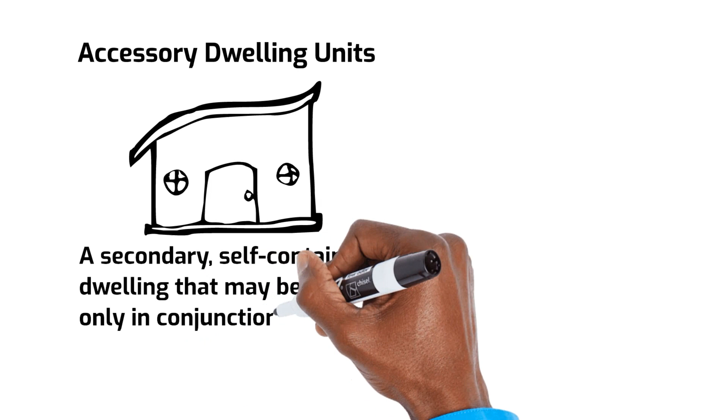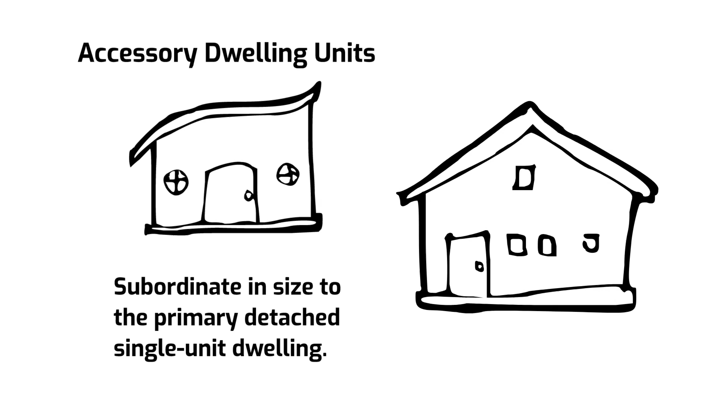Accessory dwelling units, also called ADUs, are defined as a secondary self-contained dwelling that may be allowed only in conjunction with a detached single-unit dwelling. An accessory dwelling unit is subordinate in size to the primary detached single-unit dwelling and has a separate kitchen, bathroom, and sleeping area, and may be located within, attached to, or detached from the primary single-unit dwelling.

A dwelling unit, also simply called dwelling or unit, is a single unit providing complete, independent living facilities for one or more persons, including permanent provisions for living, sleeping, eating, cooking, and sanitation.

Kitchen is any indoor habitable area designed or used for preparation or cooking of food and includes any three of the following: a sink larger than 18 inches by 18 inches, a 220-volt electrical outlet, a gas or propane service line, a dishwashing machine, a range hood, exhaust vent or similar equipment, or a stove, range, or oven.

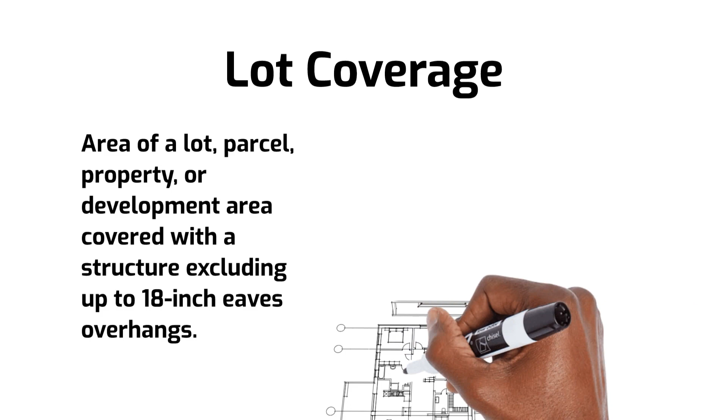Lot coverage is the area of a lot, parcel, property, or development area covered with a structure, excluding up to 18-inch eaves overhangs.

Single room occupancy, or SRO, is a residential property that contains multiple single room dwelling units where each unit is for occupancy by a single eligible individual. The unit need not, but may, contain food preparation or sanitary facilities, or both.

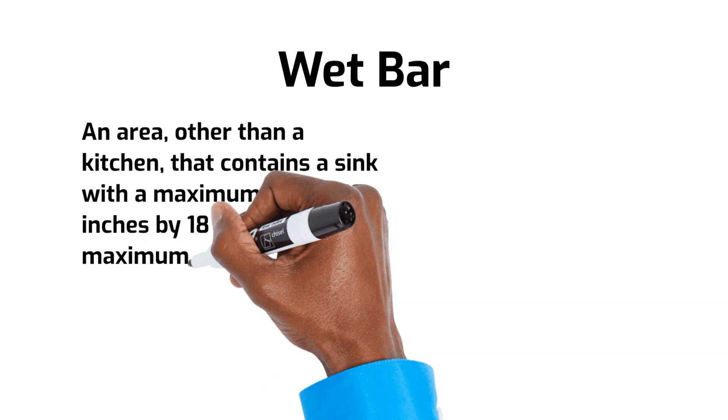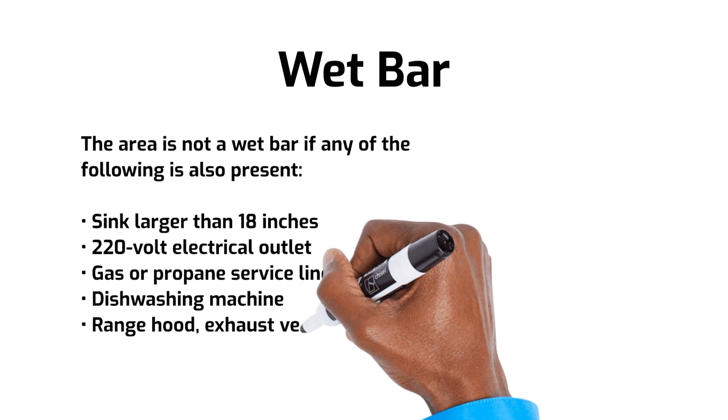Wet bar: an area, other than a kitchen, that contains a sink with a maximum size of 18 inches by 18 inches. The maximum size of the trap arm and drain for the wet bar sink must not exceed 1 1/2 inches. The area is not a wet bar if any of the following is also present: a sink larger than 18 inches, a 220-volt electrical outlet, a gas or propane service line, a dishwashing machine, a range hood, exhaust vent or similar equipment, or a stove, range, or oven.

The following terms have been added as part of the Development Code updates.

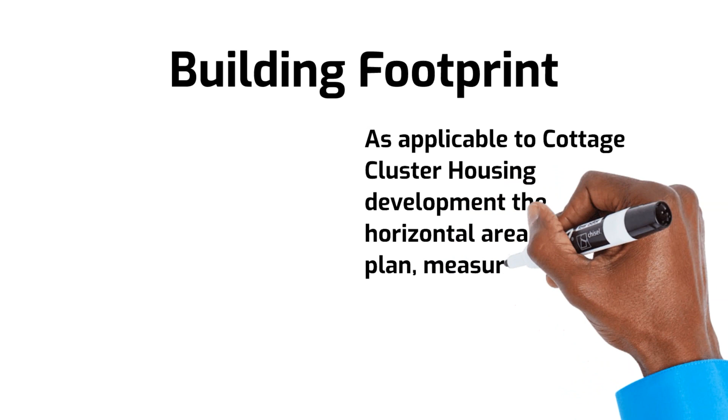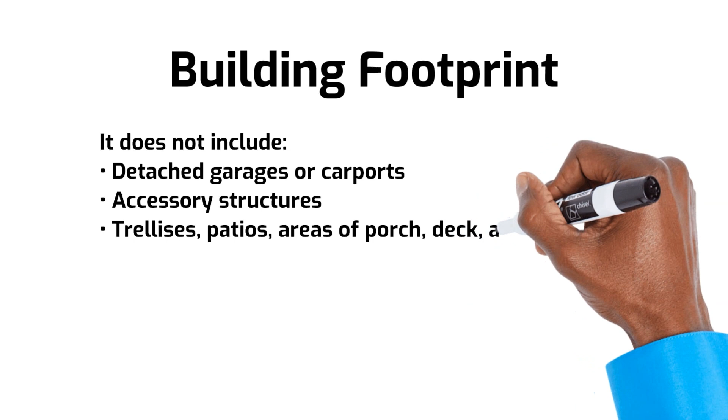Building footprint, as applicable to cottage cluster housing development, is the horizontal area as seen in plan, measured from outside of all exterior walls and supporting columns. It includes dwellings and any area of attached garage that exceeds 200 square feet. It does not include detached garages or carports, accessory structures, trellises, patios, areas of porch, deck, and balcony less than 30 inches from finished grade, cantilevered covers, porches, or projections, or ramps and stairways required for access.

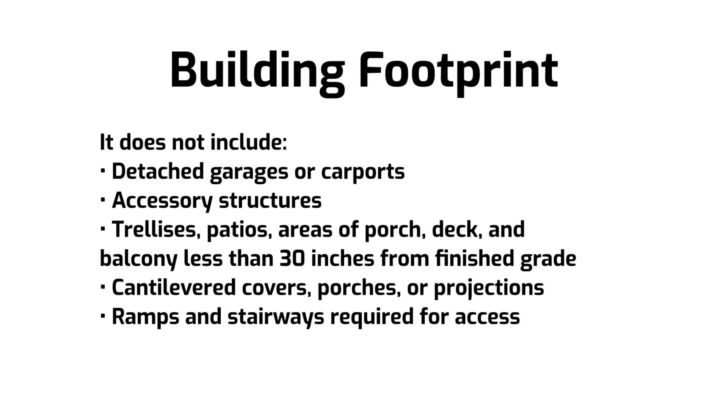The term middle housing refers to duplexes, triplexes, fourplexes, cottage cluster housing, and townhouses.

There are now two types of short-term rentals included with the updated code. The first, Type 1 short-term rental, is a single-unit dwelling occupied by one or more occupants as a primary residence, where lodging is provided for compensation, with or without meals, for a period of less than 30 consecutive calendar days, counting portions of calendar days as full days, for more than 7 calendar days per year.

A Type 2 short-term rental is a single-unit dwelling not occupied as a primary residence, arranged or used for lodging for compensation, with or without meals, for a period of less than 30 consecutive calendar days, counting portions of calendar days as full days, for more than 7 calendar days per year.

Finally, walkable distance is defined as the shortest distance as measured along a straight line between a point along the perimeter of the development site and a point along the property line of the destination.

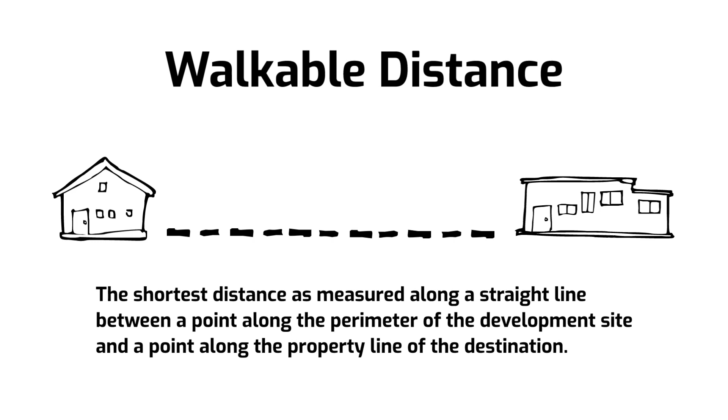For more information regarding these terms and additional changes to Springfield's Development Code, visit our city website at springfield-or.gov.